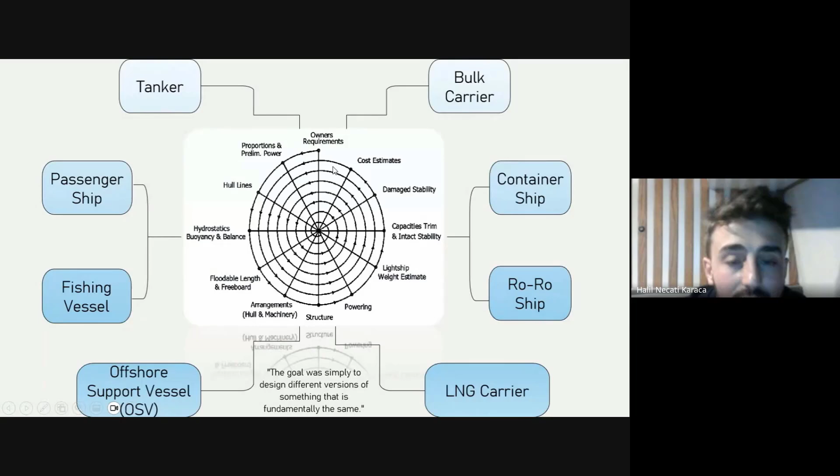When we think about it, if we create a fishing vessel, the process will be the same. If the process is the same, we can teach that to AI, and this is not that hard. Right now we can say two things: first, AI works with numbers, and second, the ship design process, when we check the basics, is the same. Let's continue with my work on that subject.

As I said, I worked on this for one year and created an application. This is a basic application, but it gives us results, and during the webinar we will create a 3D hull model. First I want to tell you the process of how we started this project. Everybody knows hull ships and hull types are so different - tanker ships are very different, and other ship types have different hull models. That's why in the beginning we just wanted to choose a ship area.

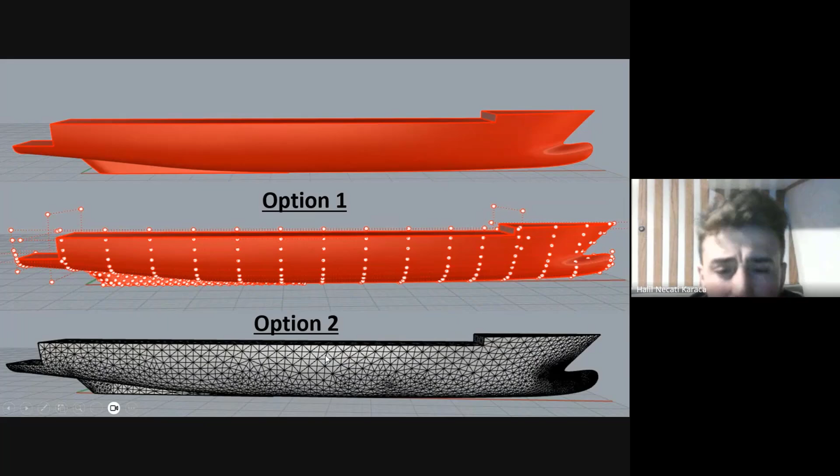After that I could make a choice. There were 2 options. First, we could work with NURBS surfaces, control points, and that mathematics. Second option was working with mesh. I chose the mesh option because for calculation and the whole process, meshes are more basic since their structure is not very complex. That's why I chose option 2 in the beginning, and we created the process with mesh.

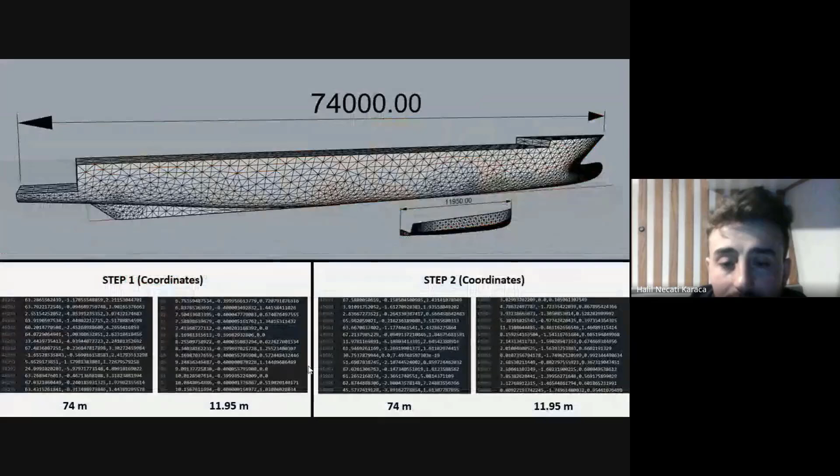When we create the meshes, there was a big problem. If you want to create a machine learning algorithm, the data count has to be the same. For example, when you convert a boat to mesh, this boat can have 5,000 mesh points, but when you create a small boat, the mesh count will be different. If the mesh count is different, we can't do any machine learning. That's why the data has to be the same count.

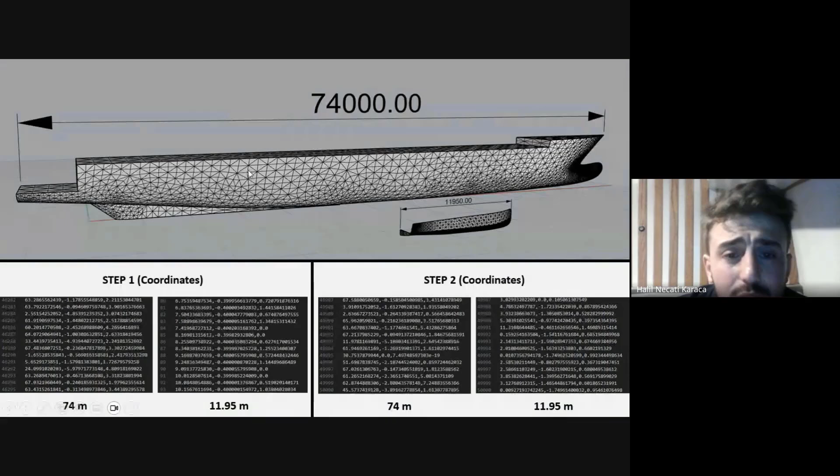We found some algorithms and with software we made the mesh numbers the same, but it didn't work because meshes include 2 different files: one about coordinates and one about connections. The coordinate file includes corner coordinates for every triangle, and the face file shows how the triangles are connected. So there are 2 different files, and even with the same mesh count, the files will still be different and you can't do machine learning.

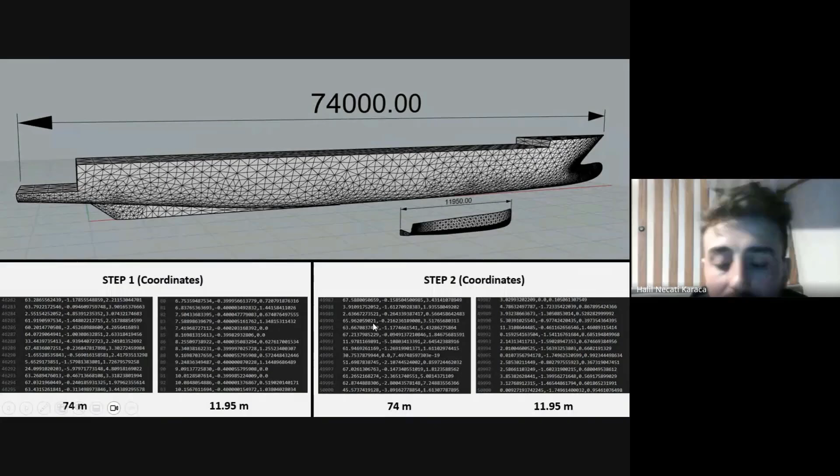That's why we used a mathematical algorithm, and finally the counts were the same and we created the machine learning algorithm. Right now I want to show you this basic application, and I want to show you an example too.

I'm coming to the small application. In the folder paths part, I will choose the file locations. The save-all-model option is choosing the machine learning model. In the past I created that model, and right now I am using it - this is 16 gigabytes, and creating that file takes so long that I'm not creating it during the webinar.

I created it in the past, and I just want to use it right now. We can say this is our machine learning algorithm. Actually, in that file we can see the whole AI knowledge. I am choosing that file, and the location will come here.

Secondly, we will create a new hull design, a 3D model actually. For this we have to choose a location. I want to write coordinates. Secondly, we have to import the data. I am choosing, and output 1 has my data.

In the PowerPoint I was showing that all this information is inside that txt file. I am choosing the open option and prediction. During the process we are changing the numbers for this app file. I will just write suggestion.

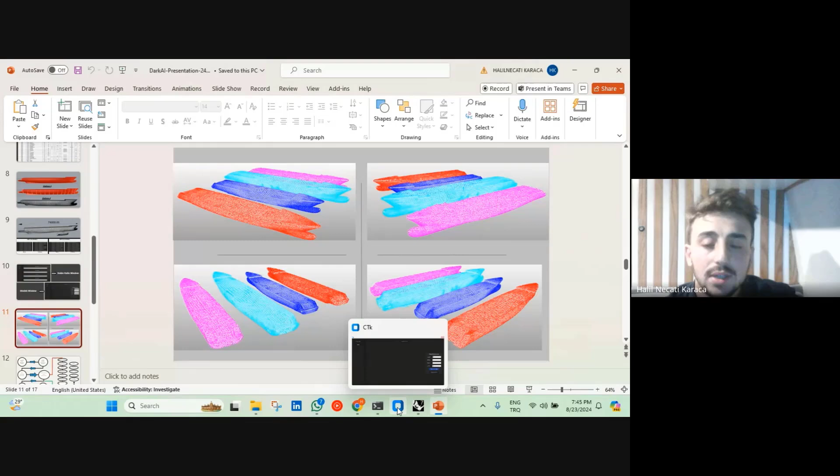Right now I can continue with PowerPoint. When that application finishes the job, we will see the designs created. This hull model is totally created with that machine learning algorithm. Of course they seem like our database, but they are totally different. With every AI application, the result will be similar to your data.

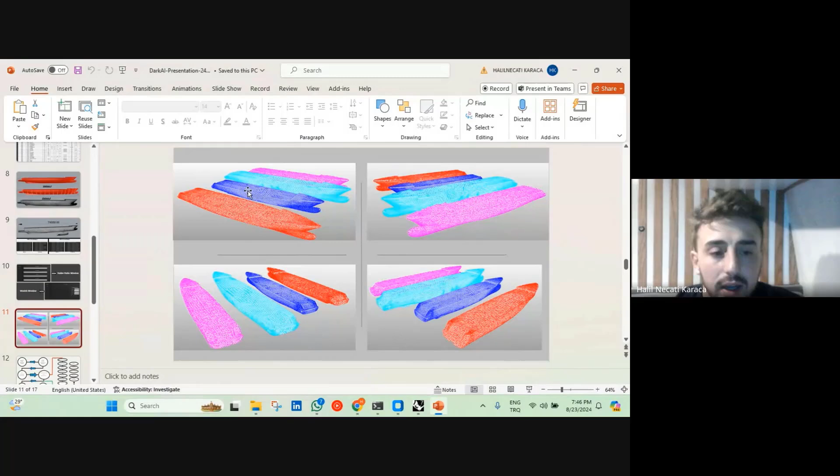Until this time, we saw that we can create new 3D hull models or 3D designs too with just AI. But this one was so basic algorithm, really. If you want to create a good AI design for the naval architecture sector, it will work definitely very, very good. Actually, I am working on that subject since 1 year, because when I see the result, it was real.

Couple of years later, probably we will see that, and maybe we will do that, or maybe some companies will do that and they will give us. Right now, how we can increase that AI? Actually, AI is not true for now, machine learning model I will say. How we can increase that machine learning model and we can create an AI model, and this AI model can be so useful for naval architecture sector.

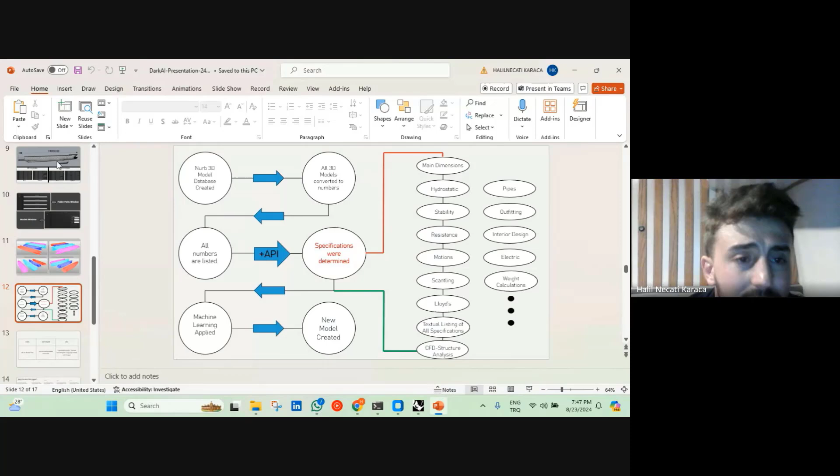Firstly, we were working with mesh. Actually this is a problem for everybody, because if you are working since a long time in naval architecture sector, generally nobody likes the meshes, because when you do some jobs, meshes are every time problematic. That's why in the beginning, we can continue to process with NURBS surfaces.

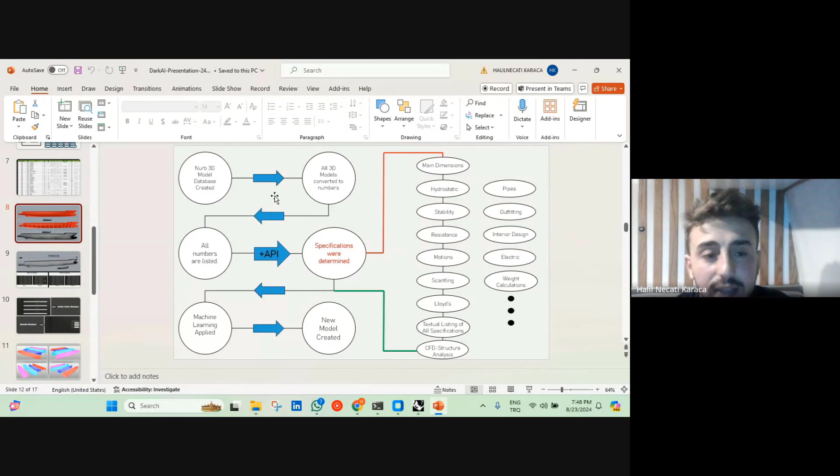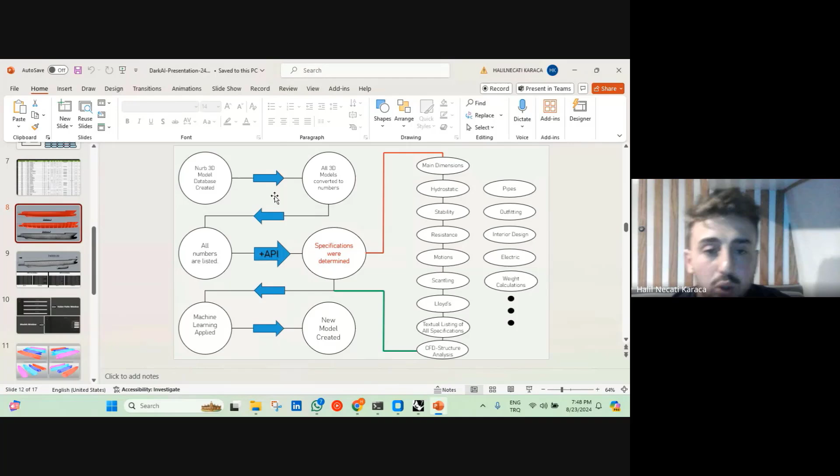Actually, in Rhino we are seeing just normal 3D shapes, but under the Rhino, all that shapes have a mathematic, they have numbers too. If they have some numbers, of course we can take that numbers and we can show the AI, and it will create the true groups, and in that case it will create the new designs too.

That's why our first step must be to create the 3D model database. Then secondly, we will convert all that 3D models to numbers. And after this, we will list all that numbers, because every number has to be in true place, and at the same time whole 3D model numbers have to be same count. That's why we have to list all that numbers, and after that we can continue with API.

Actually this is an easy job, because ChatGPT or Gemini, this type of AI models are sharing their APIs. And when we import that APIs to our software, just our AI model will know a lot of things, because everybody knows ChatGPT knows a lot about ships. At the same time, they're a language model.

When we import that APIs, somebody can write the specifications like ChatGPT, because for example if we want to create an image, we are writing the specifications, and the process will be same in that case. If we want to create a 3D ship design, then just we have to write all the specifications, and then our software or AI model will create the new 3D design.

After listing all that numbers and APIs, we can continue with specifications. For whole ships we have to create some specifications, and in that case AI can learn. And what is that specifications? For our applications, I use just four specifications, they were just the main dimensions, but we can add a lot of specifications.

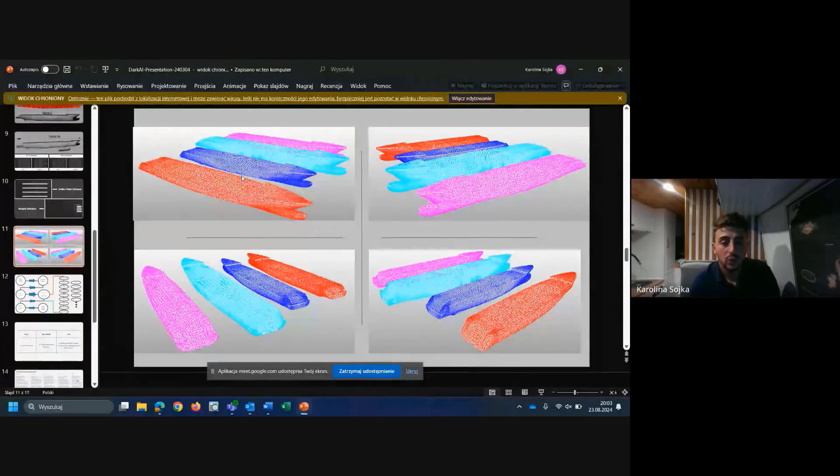And when we do that, AI will understand the difference between a yacht and a tanker. If we create our software and add all those calculations inside it, finally it will create our 3D designs. Right now we are seeing just 3D hull models, but of course this will change. If we teach the machine learning with superstructure, it will show us the superstructure too. Right now there are three different main subjects.

The first one is data, and it's the hardest part. If we want to create an AI model for every ship and use it in the industry, we have to create thousands of 3D model data. We can't take them from shipyards because generally they have agreements, so they can't share with us. They might want to, but they still can't. That's why if we are creating that AI model, we have to create that data ourselves.

Secondly, software. For software, we have to prepare all the calculations, and then when we import a 3D model inside that software, all those calculations will be prepared automatically. And for APIs, we won't do any extra job, we just import our software and the process will be done. And then, at the end of this...

It's like ChatGPT. When you want to create an image, you just tell ChatGPT, I want an image, I want to see red flowers, I want to see a good image, and we can add more details. We just write the specifications and everything, and it will create the 3D engineering model. Generally, my working process was like this.